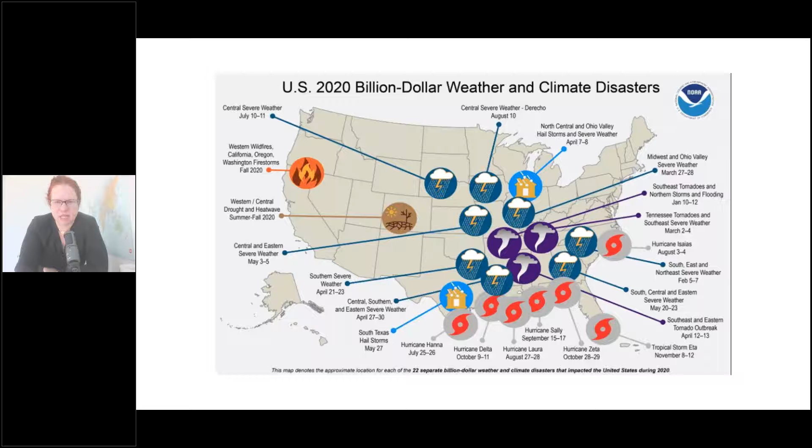We also know, next slide please, that a lot of communities have been facing a legacy that informs how recovery will play out. Policies such as redlining, which was the active disinvestment of funding into communities, specifically communities of color, as well as the planning practices put into place in the early part of the century — putting highways in place of communities, relocating communities out of safe zones into floodplains.

All of these events and histories really inform what our shape of the communities are today. And when you add a mix of extreme storms or extreme weather, we have a recipe for disaster, quite literally.

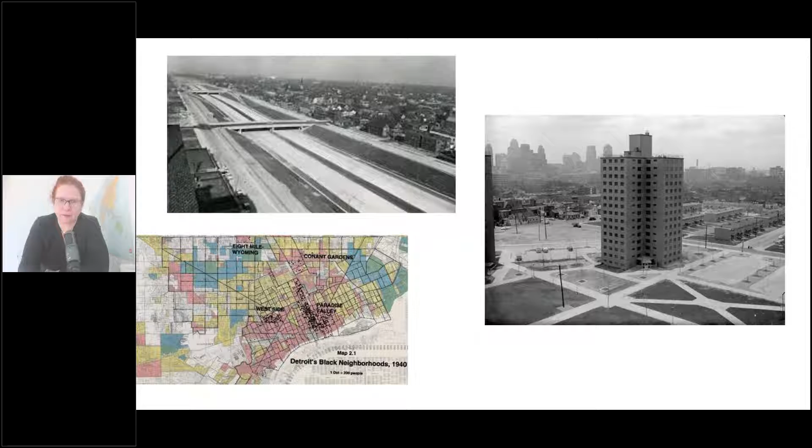It's worth mentioning that the amount of affordable housing shortage cannot be understated. This is a specific concern in Puerto Rico and the VI, where housing is just unaffordable. For most community members that work and make a wage in these communities, there's not enough resources to purchase or support a house. And the marker of unaffordability is if you pay 30% or more for your housing expenses per month. Certainly this is a problem for a lot of communities.

So when we have housing units that are undermined by extreme weather, they are not replaced easily. And we see this particularly in the VI over and over again, where residents cannot afford to live, and the repeated losses occurring with rapidity for communities is creating an incredible burden.

Many of these repeated losses translate into lowered assessed value of the home, and for many communities, assessed value is part of the generational wealth. So when we lose the value of the home, we're losing a legacy that can be passed on to generations. It's also worth noting that because of the rising costs of insurance and the incidence of valuation changing within homes, we're also seeing a lot of assets getting stranded, quite literally.

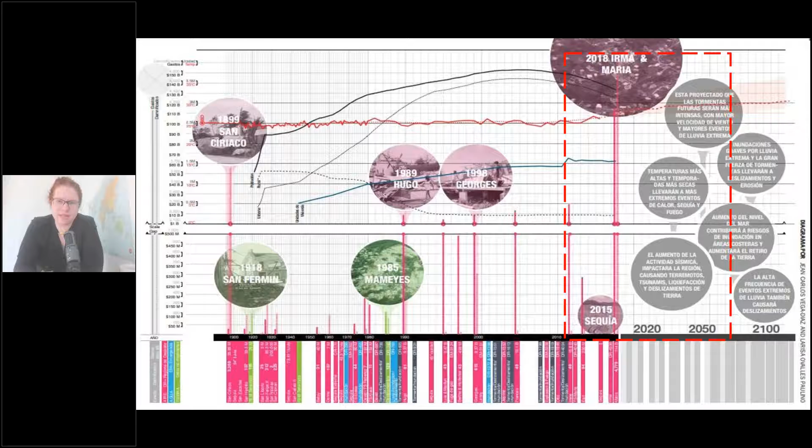So we're working deeply in many communities across Puerto Rico and the VI to try to understand what has happened in previous years to inform where we are today, and then look forward to see what we're actually building our housing to, and what conditions we should be considering as we go forward. We see that these events are occurring with rapidity, so when we work with partners and on the ground, we always bring in partners to make sure that we're collaborative and facilitative entities in a community.

I'm going to introduce you all to a book that we created in Puerto Rico called Keep Safe. Keep Safe was built upon a book that we created years ago after New York City's big event, Superstorm Sandy, occurred, where we built a book called Strategies for Multifamily Housing. This was built with communities in New York City, with affordable housing owners.

This book looks at how do we deal with certain issues around flooding, how do we treat multifamily housing buildings. This is a particular housing stock that has a particular set of needs. So we worked with those owners and operators in those buildings to figure out what specific mitigation strategies would be necessary to support that building through a flood event.

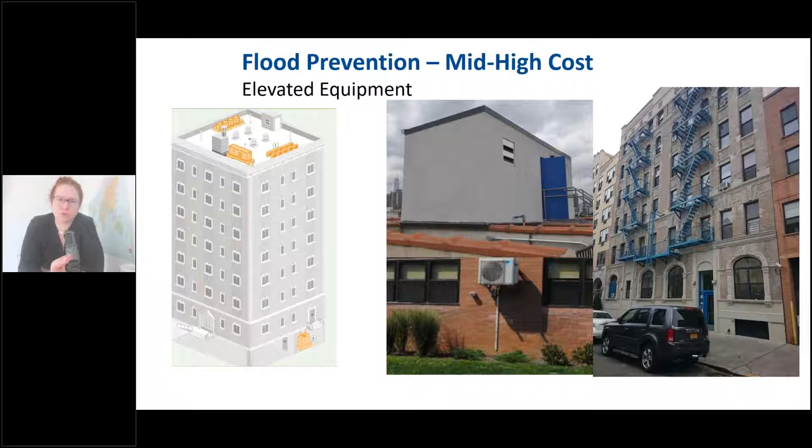And so when Hurricane Maria happened, I went down to Puerto Rico with our team to work with our partners to try to figure out how we could be helpful in supporting recovery. It's worth mentioning that we were no stranger to Puerto Rico. Enterprise had been in Puerto Rico working to build housing and facilitate affordable housing for close to 30 years. So we have strong, long-standing partners on the island, and we immediately got into gear to figure out what we could do to support recovery.

And the damage that occurred in Puerto Rico after Maria was enormous. 90,000 homes were damaged or destroyed by the 155-mile-per-hour winds. This was an event like none other. The world watched how so many communities were stranded by the electrical grid, or left really trying to feel through how to get tools and resources and water. It was a terrible, terrible scenario for the many communities in Puerto Rico.

One of the biggest concerns we faced was the electrical grid just was not up to the conditions that were waged on it. We had distribution lines scattered all across the island, and still a lot of energy is still not back. Almost 80% of the island's crop value was wiped out. So the losses were huge, and what happened was a lot of housing units were just uninhabitable.

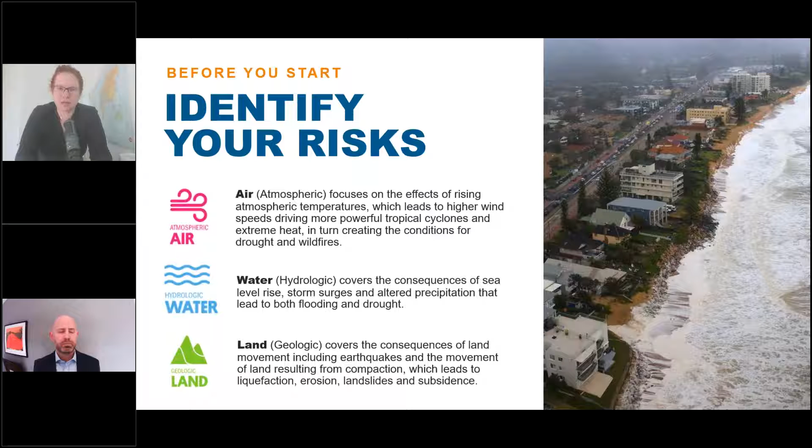Essentially, what we first ask is, what are your risks? Is it water, hydrologic? Is it air? Is it land? In Puerto Rico, we have all risks, so we're dealing with all of the risks that confront us. This is a critical piece because it is a very unique scenario. Many communities don't have all risks, and Puerto Rico has to understand all of these risks now and going forward.

We take those risks and interpose them with housing and the site you're building on. The book is intended for the layperson, someone who may not be a trained architect or designer. It's a visually compelling book that helps anyone touching housing understand where they should be focusing.

The main sections of the book follow the sequence of how you build: Introduction, moving through the safer site—what's on your site, what are the conditions—moving into building protection, the bones of your building, then moving into passive habitability—how do you develop and build the house with an understanding of the natural conditions around you.

Then we move into energy generation and backup. Chapter 5 takes us through water management and water catchment. Then we move into household preparedness, community engagement, and finish with how you put it together and build it.

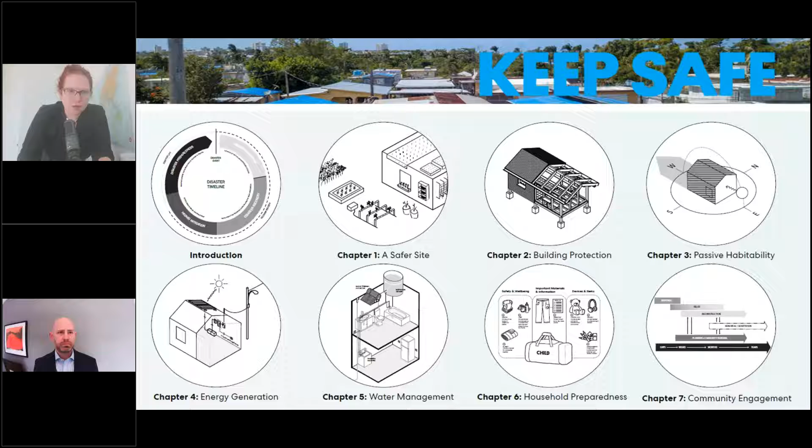This is a big book, there's a lot there. We go through soil orders, we go through where the site is, and we move through what the grid means and how it intersects with your housing.

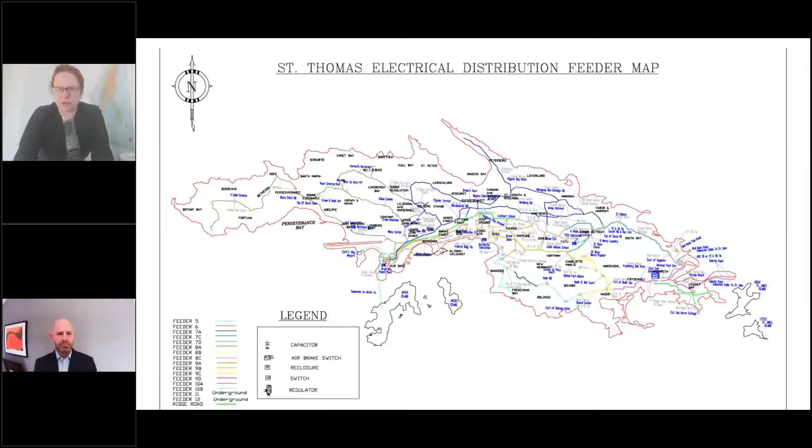We're learning from the past and adapting for the future. That's a lesson I would communicate to all of us today when we think about housing in the Caribbean, because there's a lot we can learn from the lessons of the past. We move into all of these different systems.

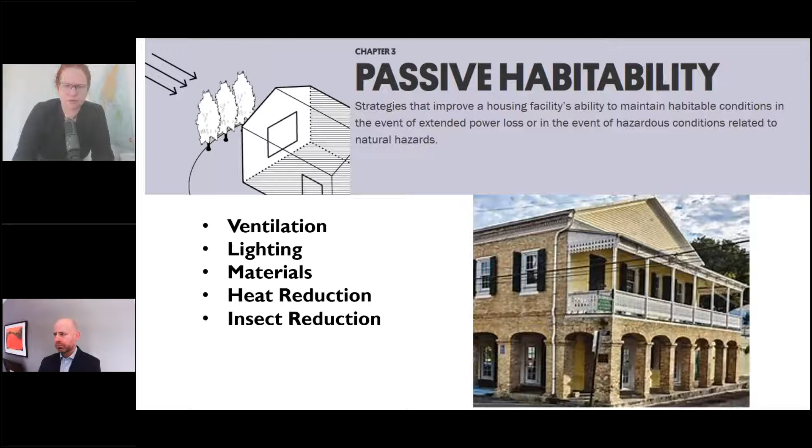Looking at solar orientation, looking at all of these different features of the site.

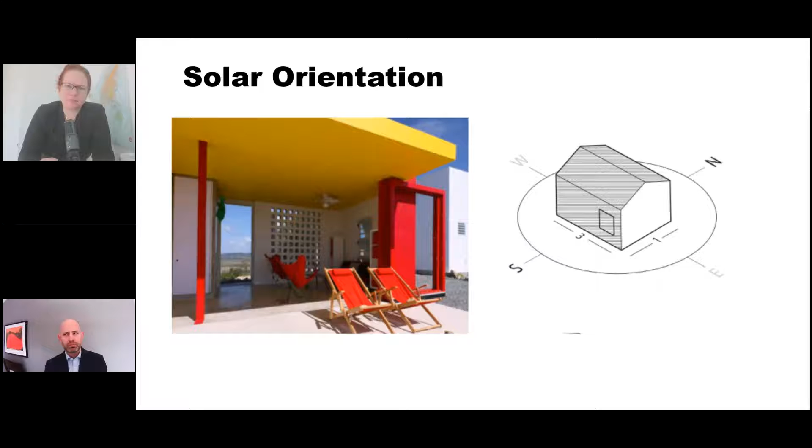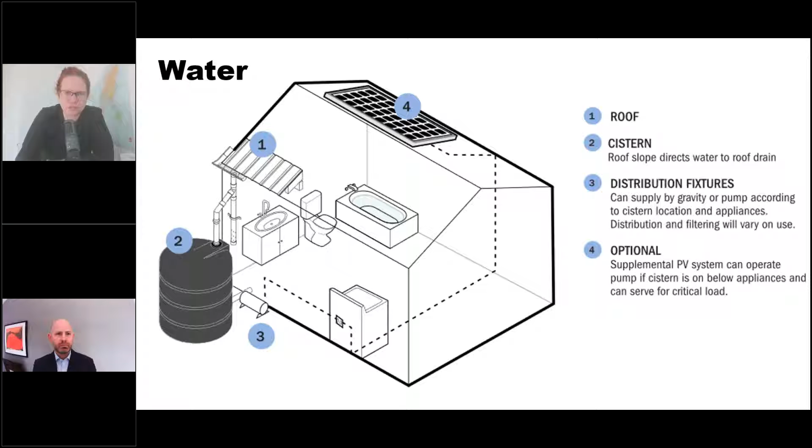We're also looking at community scale work—how do we build community centers that are going to be resilient and able to help support communities? Bringing communities together, how do you build a community infrastructure and community resiliency center?

To conclude, this book is available. We train a lot in Puerto Rico and the Virgin Islands on it. We've also taken it to Florida, so we've got a Keep Safe Miami effort, and we're using this book to inform a lot of our work around the country. I'm really excited to be part of this conversation today. Contact me if you'd like a copy of the book or more information about this really important piece of guidance.

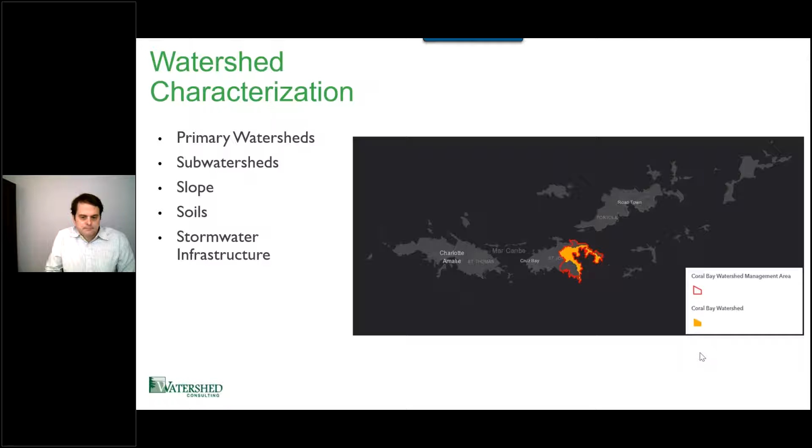So the main watersheds in Coral Bay, where the Coral Bay Community Council manages, are Great Lameshur, Coral Bay, and Mennebeck Bay. The watershed we focused on in this watershed plan update was Coral Bay, which is the main watershed shown in orange in the middle.

I'm not sure I actually mentioned that the work I'm doing is giving kind of a technical snapshot of some of the analysis that went into the watershed management plan. The Coral Bay watershed management plan was updated, complete at the end of last year. This was a 5-year update, so now there's a new version available that's going to carry forward the next 5 years. That's where this information has come from.

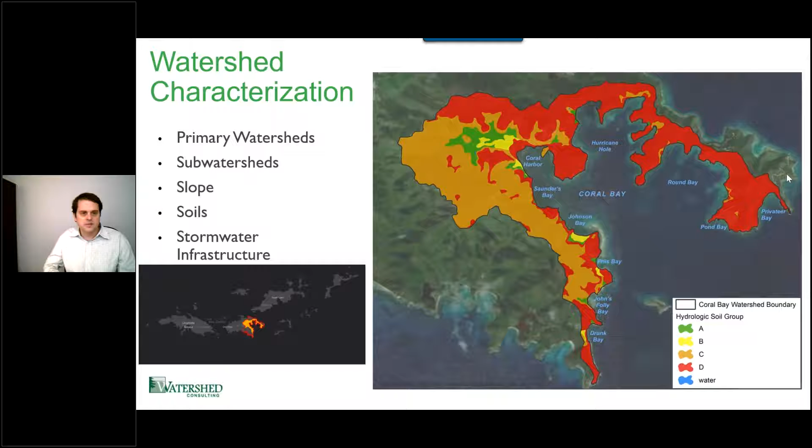When we started this work, there were a number of infrastructure asset points mapped, and we did some refinement of those points as we went along. Just to give you an idea, those points are things like culverts, swales, water bars—that type of infrastructure. Coral Bay is predominantly a residential area, and development is diffuse. There's a more urbanized center, but also a lot of diffuse development up the hills, involving roads, driveways, and residential units that surround the main town area.

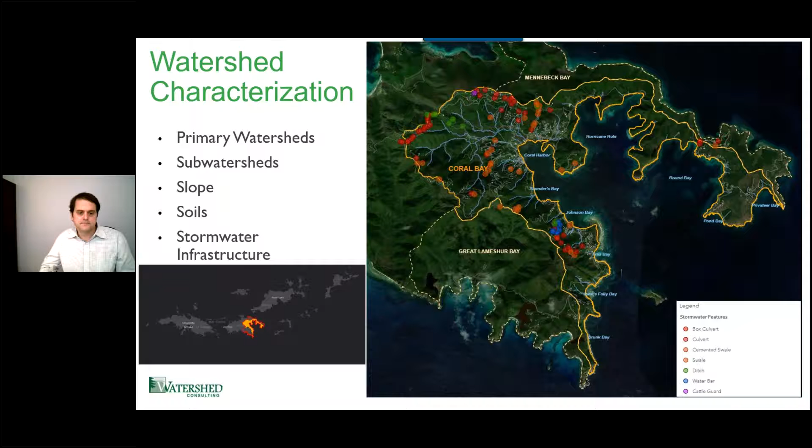As part of our plan, we used a water quality modeling tool called the Watershed Treatment Model, a spreadsheet tool developed by the Center for Watershed Protection. The goal was to investigate the location and severity of land-based sources of pollution, since there are quite a few issues with that. We needed a tool to assess nitrogen, phosphorus, suspended sediments, and fecal coliform based on potential sources like land use, soil type, sewage use and disposal, gut erosion, and marina characteristics.

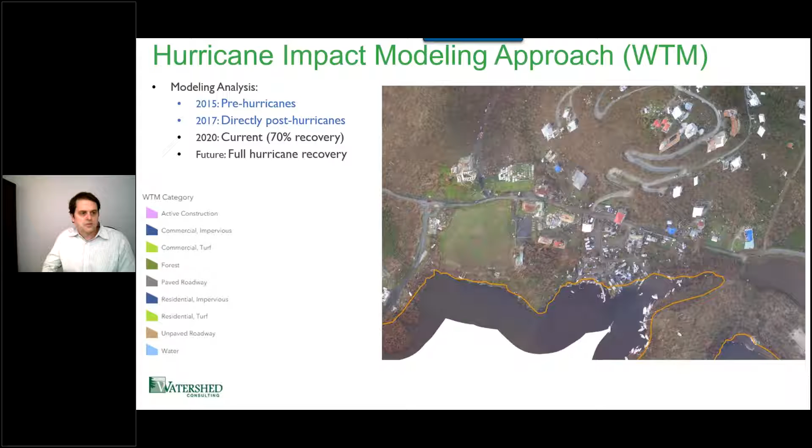We were really focused on the impact of Hurricanes Irma and Maria in 2017, which was the defining moment of the past 5 years. We modeled 4 conditions. The first was 2015, before the hurricanes. The next was 2017, directly after the hurricanes—this image shown here was clearly right after the hurricane, so we looked at the land use conditions at that time.

Then we looked at the current conditions, which assumed 70% of the homes or businesses that were destroyed were recovered, based on data from the Coral Bay Community Council. When damage occurs to these places, it means there's disturbed land, more prone to erosion and sedimentation. As things recovered, homes were restored, rebuilt, and the land around them stabilized. So in the current, 2020 condition, we assumed 70% of destroyed areas were recovered. The final condition was the full hurricane recovery condition, which is the future condition.

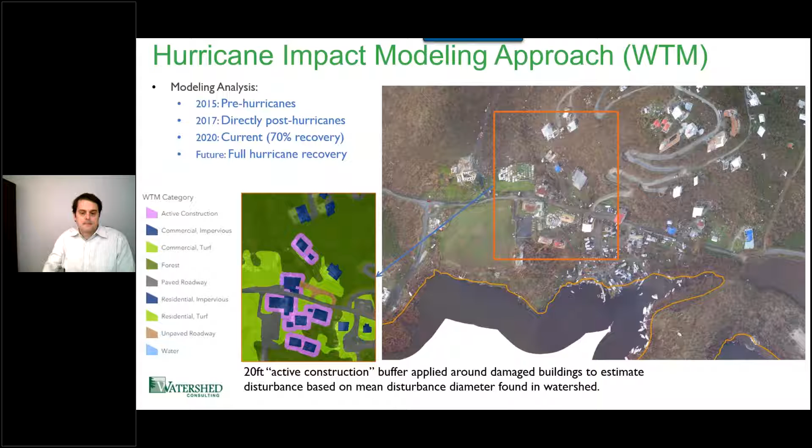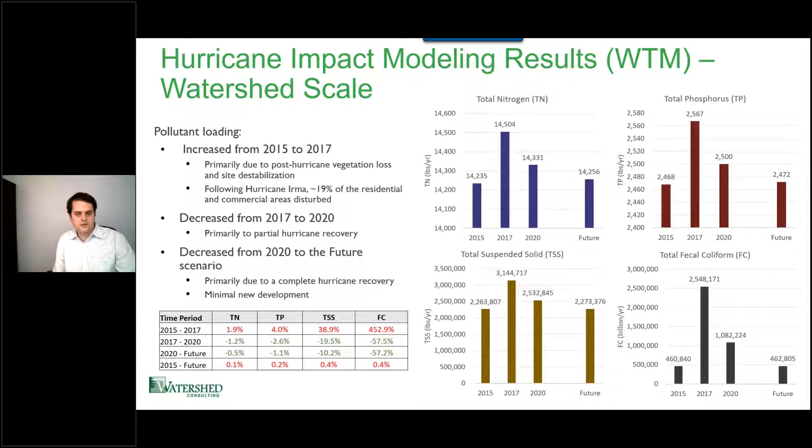That trend of peaking right after the hurricanes was constant across all the different pollutants that we modeled.

The other thing we did was look at road paving as a best management practice in Coral Bay, which might seem odd since paving roads isn't typically considered a stormwater BMP. However, conditions in Coral Bay really necessitate stabilizing a lot of roads. You can see in this upper photo the roads are incredibly steep and act as a conduit for water. Since unpaved roads are often unstable and lack proper hardened surface material, you get a lot of erosion right down the road, and the water follows it, carrying sedimentation down to the harbor.

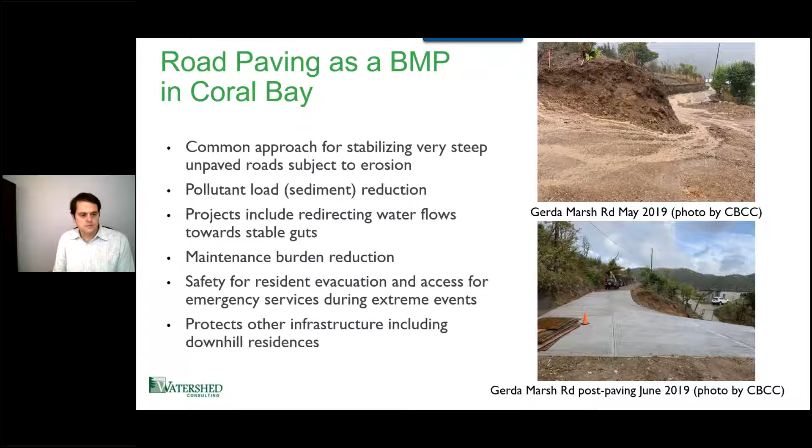So we looked at the unpaved road network and its effect in terms of sedimentation to the harbor.

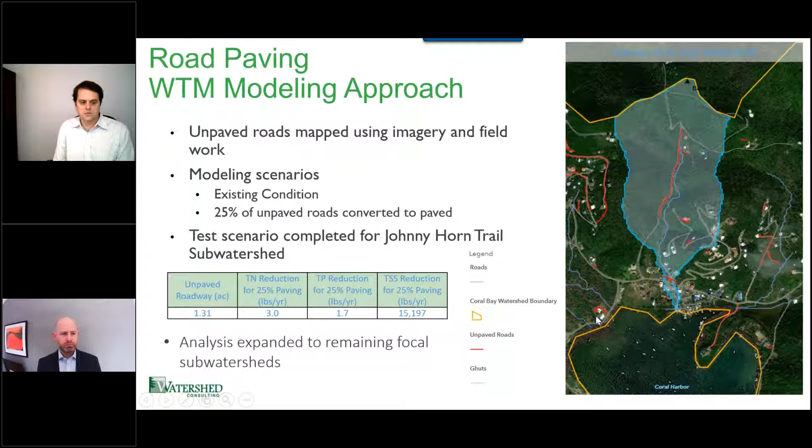We took one of the sub-watersheds, the Johnny Horn Trail sub-watershed, and did a test analysis investigating what would happen if 25% of the unpaved roads were converted to paved. It showed a fairly significant impact on pollutant loading—not just TSS, but nitrogen and phosphorus as well. So we expanded that analysis to the rest of the watershed.

When we expanded it to the rest of the watershed, we learned that paving, to an extent, is really important as a BMP and has a real place in the watershed as a way to manage sediment and erosion to the harbor.

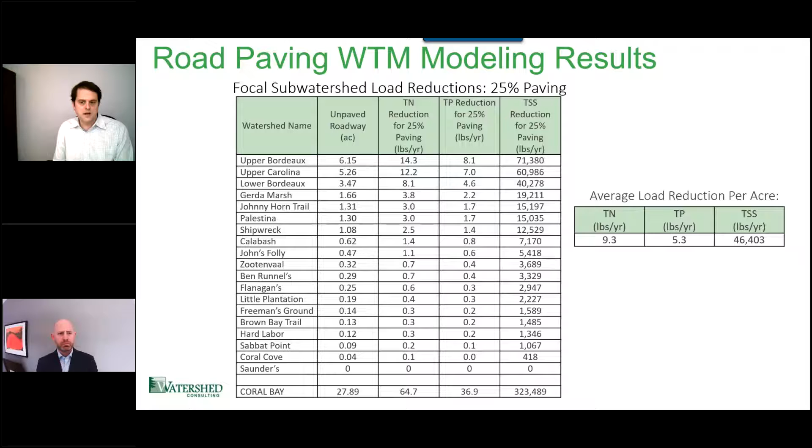But we didn't know where in the watershed we should recommend paving to occur. So we did a second analysis looking at the slopes in relation to where all the unpaved roads were located.

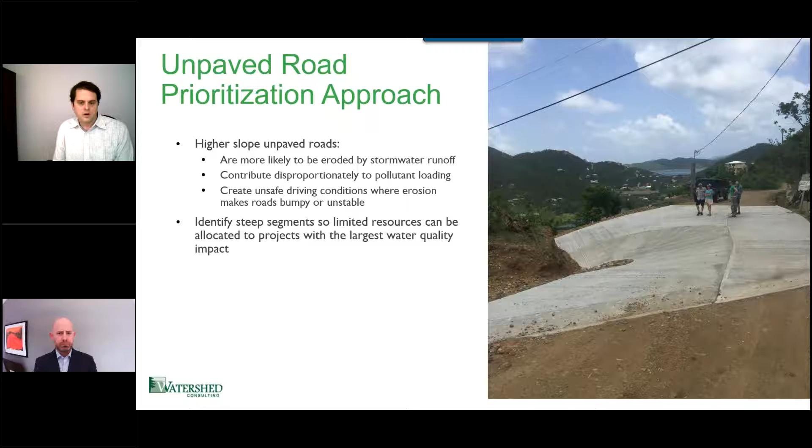We found there are 28 acres of unpaved roads in the watershed. We divided them into 100-foot segments, calculated the average slope, and categorized those by low, moderate, or high slope. The other piece of modeling we did was modeling flow as well—specifically peak flow, because we wanted to understand how peak flow also influenced water quality impact.

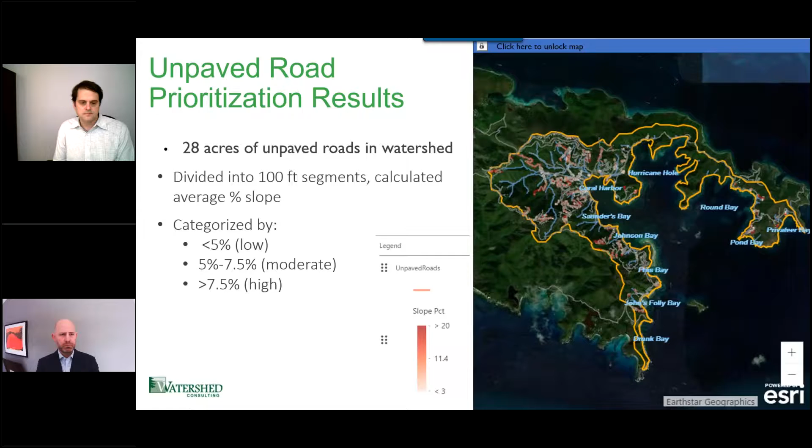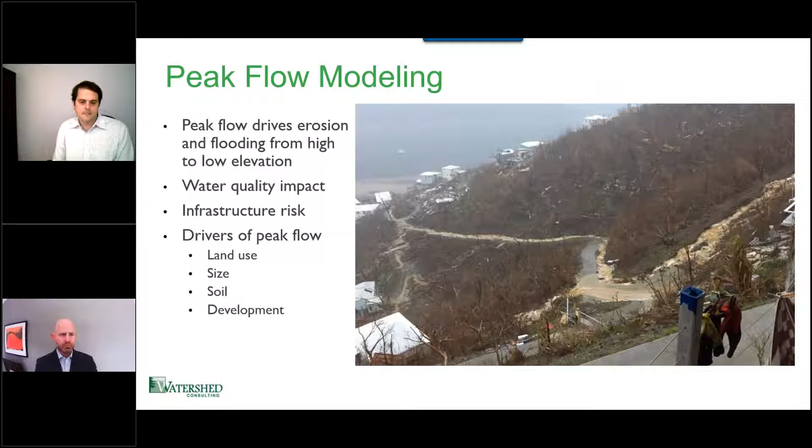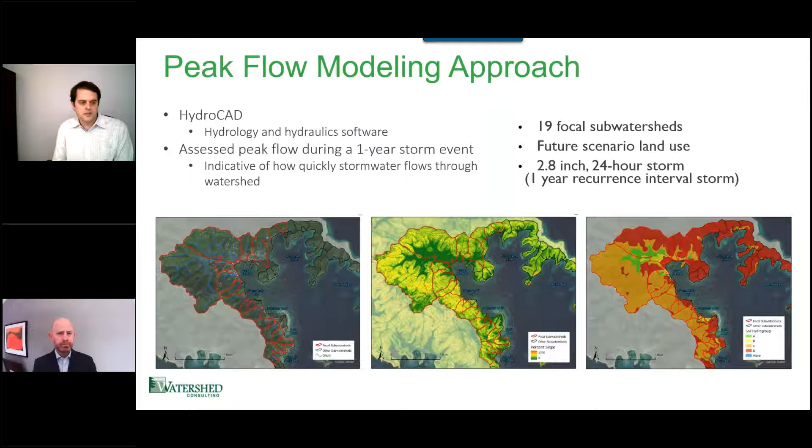We used a tool called HydroCAD for that. We modeled the 1-year storm event, about 2.8 inches in 24 hours, for the 19 sub-watersheds presented at the beginning of the presentation.

Just quickly in a nutshell, I think the modeling really showed that impervious cover alone will not be enough to reduce the peak flows. Really, it was focusing our recommendation on managing flow patterns at the neighborhood scale, focusing on disconnecting impervious surfaces and restoring the natural flow patterns in the watershed.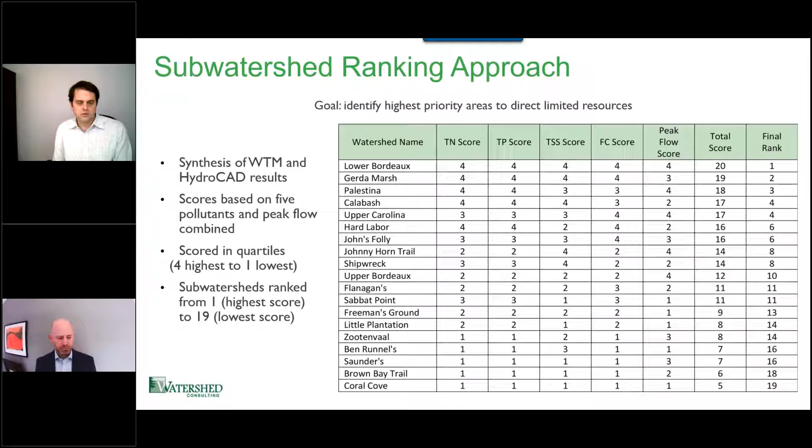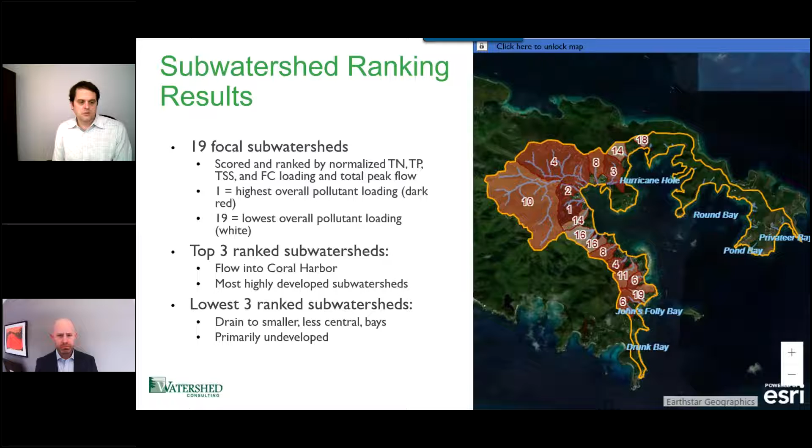And so here it is in graphic format. You can see on the right, 1, 2, and 3 are right in the inner Coral Harbor. Those are our highest ranked subwatersheds. And the lowest 3 were ones draining to smaller, less central bays and really primarily undeveloped. I think this is my final slide here.

Back up just 1. So the 3 highest there are in red, the arrow, that's Coral Harbor. The really great thing was that those results did check out with the visual results that people living in the watershed, and also Coral Bay Community Council, were observing in terms of where the sediment originates from during storms. It's really that inner harbor which is producing most of the sediment load. So it's a good check in terms of our methods.

And I think the important thing is that this lays out a nice quantifiable approach moving forward to take targeted action to reduce sediment and other pollutants to Coral Harbor. And I think it can be broadly applied to other similar watershed plans in the future. So I appreciate your time, and thank you.

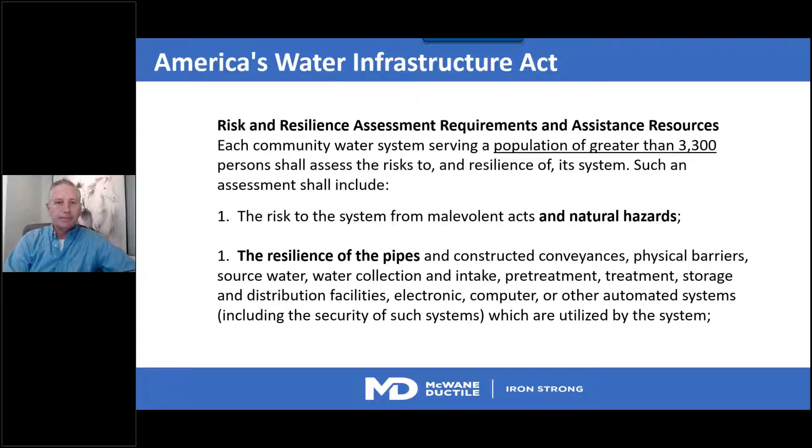Here's a little bit more of a detailed slide for the seismic activity. Those in very active, seismically active areas are well aware of this, but also in surrounding areas, even though you might not be in a red bullseye, those close to it can also be very much impacted. You can see in the slide on the left down at the bottom, Puerto Rico is an extremely seismically active area, so they have the impact of hurricanes as well as seismic activity.

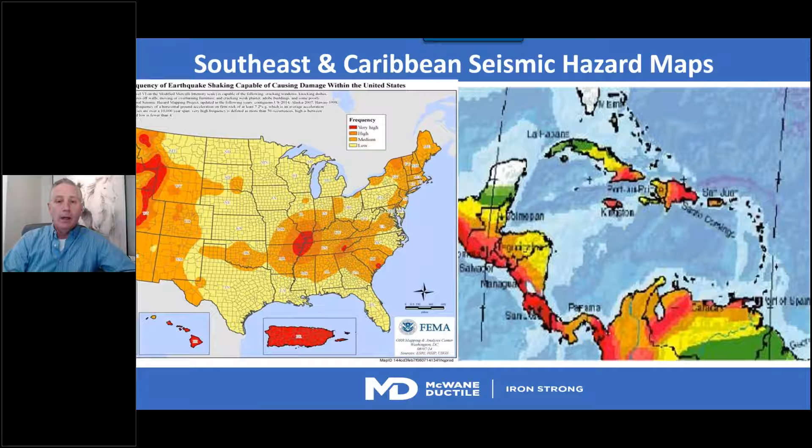This is a schematic that helps us identify what are the zones in your communities that can be most impacted by seismic activities and also storm surge. One of the things that's very important to note on this slide is look at the right-hand side, the bottom right, water saturated sand and mud, and poorly consolidated soils. That water saturated sand and mud has the highest impact from seismic activity, the most risk.

So that's very easy for us to zone in on those areas as having the highest criticality and highest risk. But also at the base of a mountain, where we have steep bedrock that comes down to a valley area, there's another zone that's number 2 for risk, in the poorly consolidated soils, or alluvial soils. They're often areas where homes are built with moderate elevation and beautiful views. Unfortunately, those areas are some of the most seismically risky because of the poorly consolidated soils.

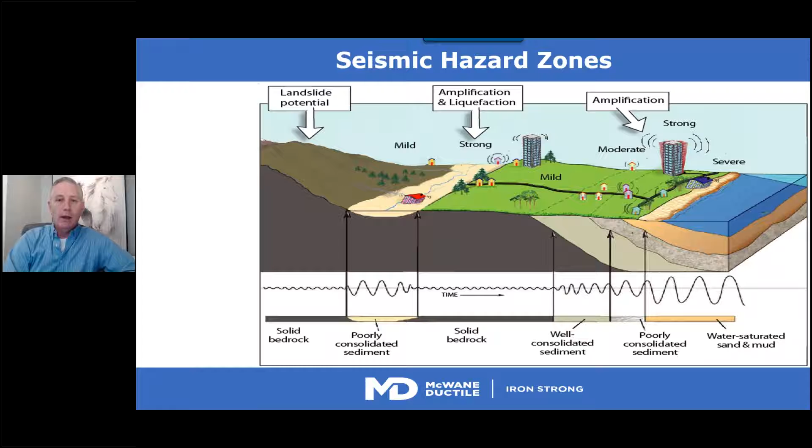So anyway, when we're looking at buried pipelines, this is a lifeline for most communities. The water and the ability to have it not be contaminated are critical to the lifeline of the community. Even though they're buried below ground, it's almost like our arteries, bringing water and life-sustaining product to our homes and businesses.

But one of the most critical things to keep in mind, besides just having clean water available, is fire protection. In the 1906 earthquake that hit San Francisco, the earthquake was devastating, but what really did the most damage to the city was the resultant fires afterwards. Natural gas lines broke, and it caused more devastation to the city than the earthquake itself.

So when we're looking for seismic resilience, we're looking to maintain that hydraulic capacity, the ability of those pipelines to not separate or become crushed by the external loads and pressures from seismic activities. We're looking to maintain hydraulic flow, and to minimize any kind of shearing damage or compression on the pipelines. And of course, we want to prevent cross-contamination.

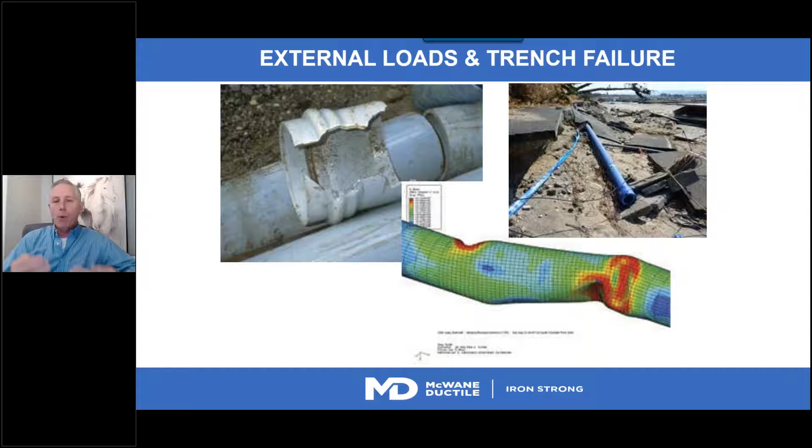On welded steel lines, the external loads will actually buckle and can potentially shear off the pipeline as well, because they're kind of rigid. They don't have the flexibility or joint deflection in order to handle the differential ground movement from seismic activities.

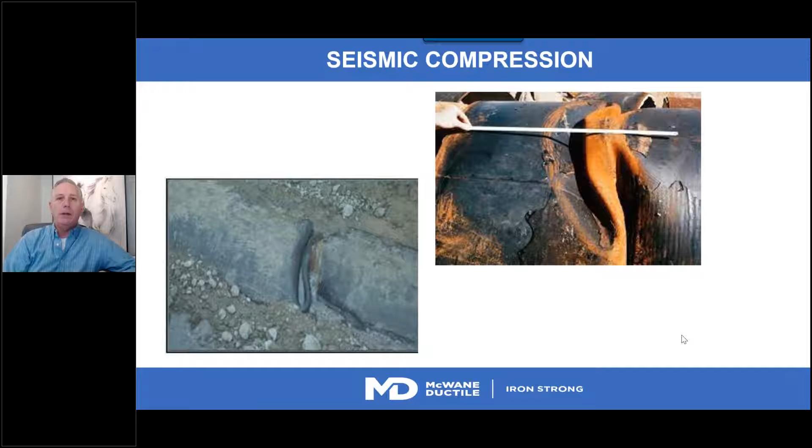Here's an example from a welded steel line where it's actually buckled. What's happened in this line is the pipeline didn't technically fail, but that buckling reduced the hydraulic capacity of that line, and the internal pressure going through that section dramatically went up. So when that happens, it's a ticking time bomb, you probably don't have a lot of time before that pipeline is going to fail. It's an area that needs to be repaired, and repaired quickly.

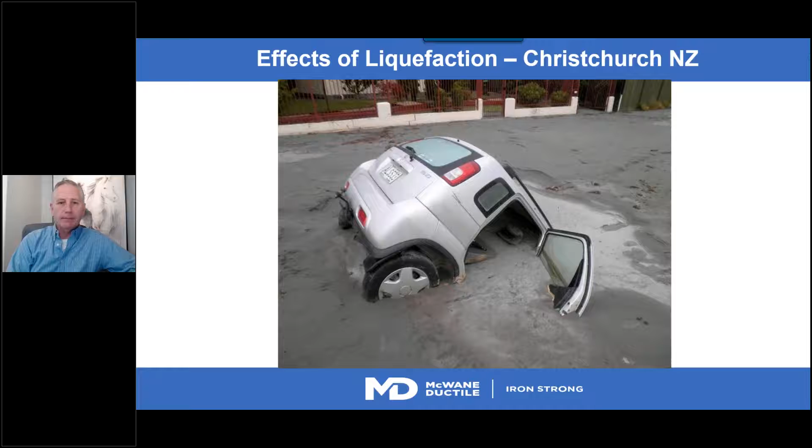So when we're looking for seismic resilience and looking at different pipe materials, all pipe materials are not made equally. The higher the tensile strength of the material, the more likely it's able to prevent buckling, crushing, or shearing. Some pipe materials, as you go down into the plastic pipe materials, become very susceptible to seismic activity and differential ground movement, either loss of the trench so the pipe doesn't have support, or a situation where the bell and spigot separate. So if forces are applied via tension or compression, they will also fail. Joint deflection is a very key component in order to provide higher resilience.

And the systems that are out there, according to the ISO 16134 international standard for seismic resilience, are ERDIP systems.

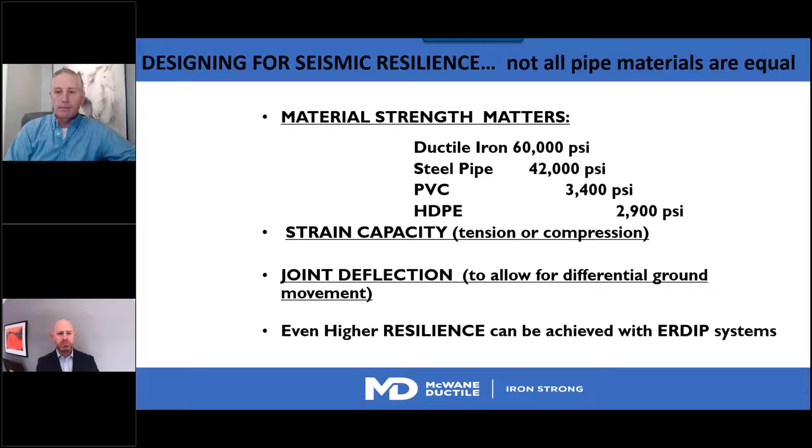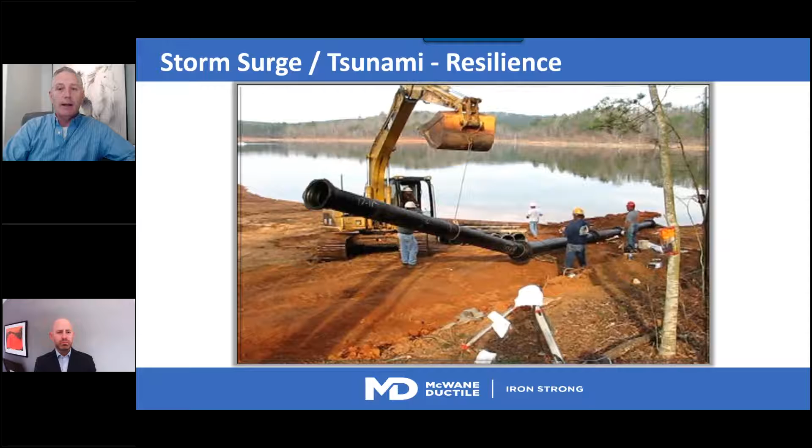Here's an example of some ductile pipe. We call it river crossing pipe. You don't even have to have it in a trench. You can lay it across a bay, an estuary, and basically it has joint deflection up to 15 degrees. It is a very valuable option for communities that can't dig a trench or want to go across a lake, stream, river, or estuary. The weight of the material settles it down into the sediment and provides all the support that pipe material needs.

So anyway, the key components of an ERDIP system are high axial strain, joint restraint, and joint deflection.

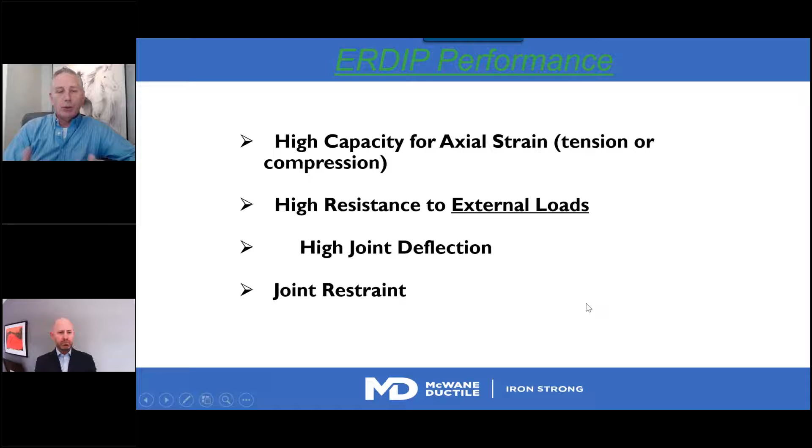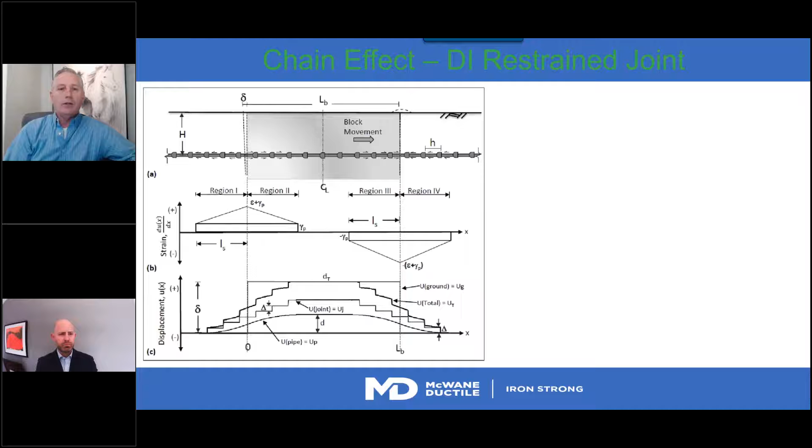So in order to increase seismic resilience, the pipe materials that can provide almost a chain effect are going to be more resilient. The chain effect allows the pipeline to deflect, to bend, but not fail.

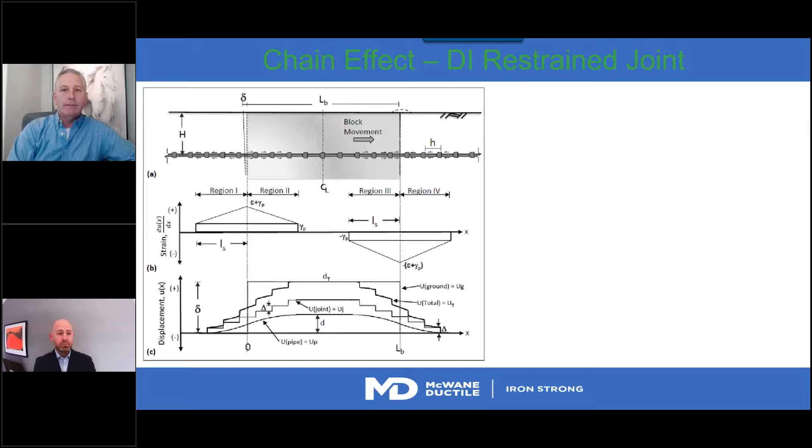So here's what the pipeline looked like in the soil. And here's what it would have looked like if we would have had that ERDIP system. It would have deflected, and it would have stayed together, and that system would not have failed.

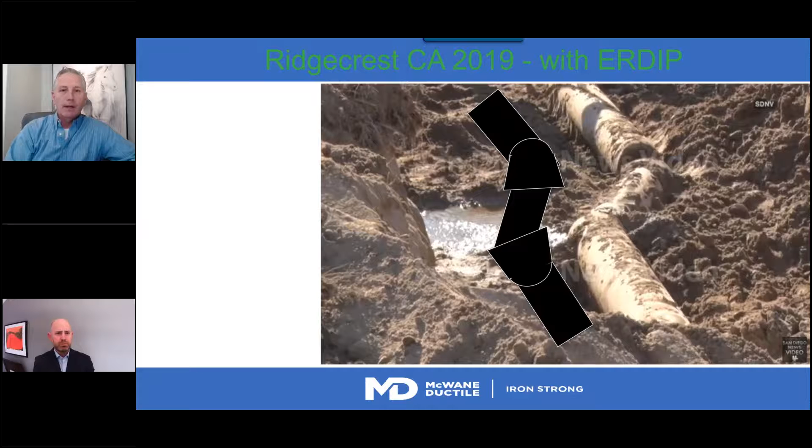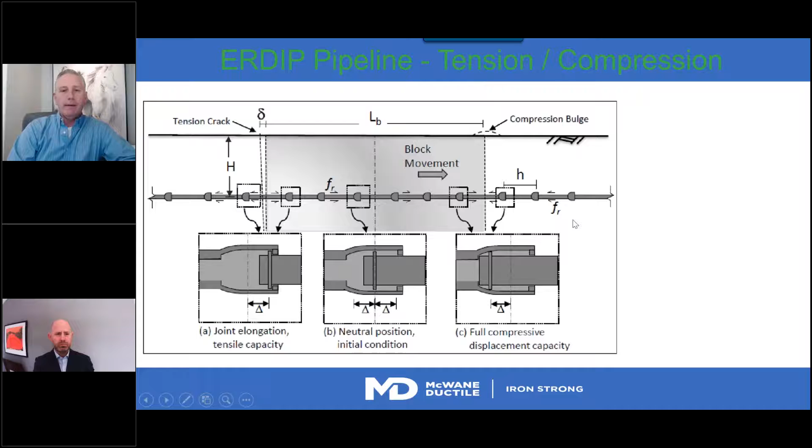Also with block displacement and movement, pipelines need to be able to have axial range where they can expand in tension or be able to move together in compression. ERDIP systems do that.

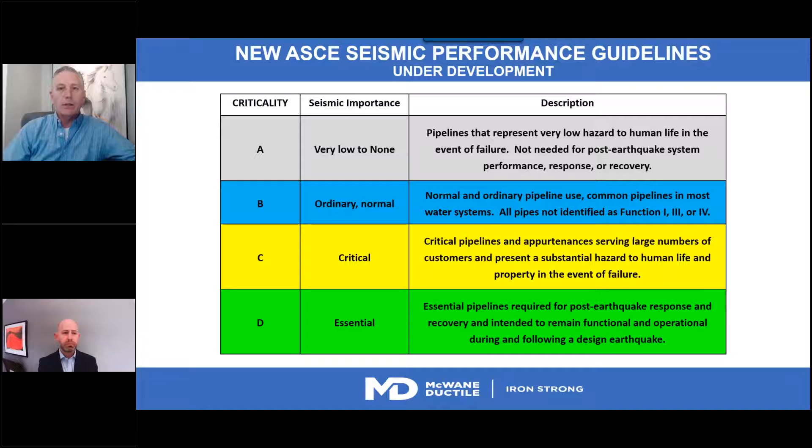So here are some guidelines that are under development with the ASCE Seismic Task Committee. These are not finalized yet, but what this does is it helps the community use some evaluation. We look at the criticalities of that infrastructure, of that pipeline you're looking at. These will probably be finalized at the Pipelines Conference coming up in June of this year, but this is the type of thing that is under discussion right now. So what we want to do is be able to adjust and look at the criticality levels and recommend commensurate levels of protection depending upon how critical that pipeline is to your community.

So this is where the rubber meets the road. You notice the color codes there, the commensurate gray, blue, yellow to green. The higher you go up in seismic resilience, here are the guidelines being discussed in order to provide adequate seismic resilience for your pipelines.

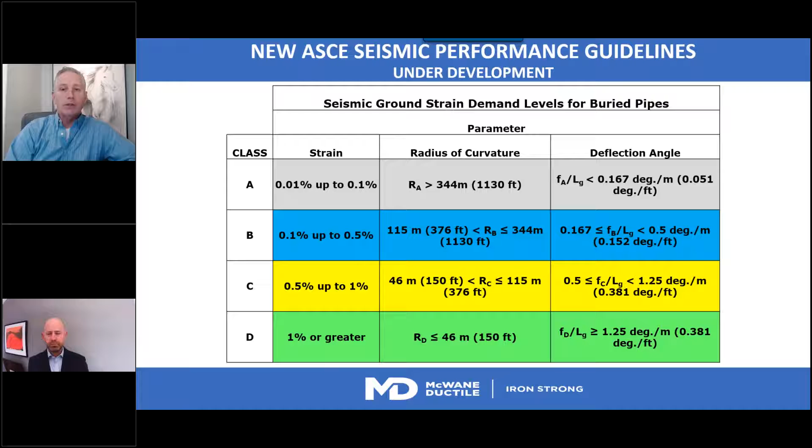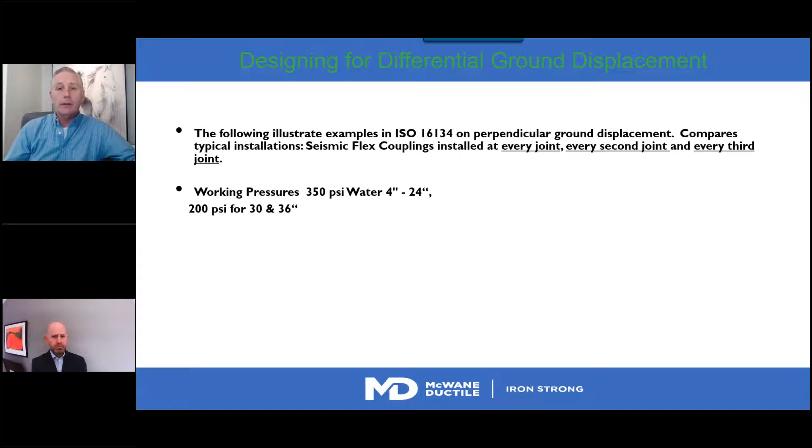So when we're looking at an example from the ISO 16134 international standard for seismic resilience, there's one material in it that provides the level of protection. Internationally, it's ductile iron.

So here's what we're looking at. We're looking at a pipeline's ability to deflect and also not come apart. That's the restraint joint for an ERDIP system. It deflects, but it does not come apart.

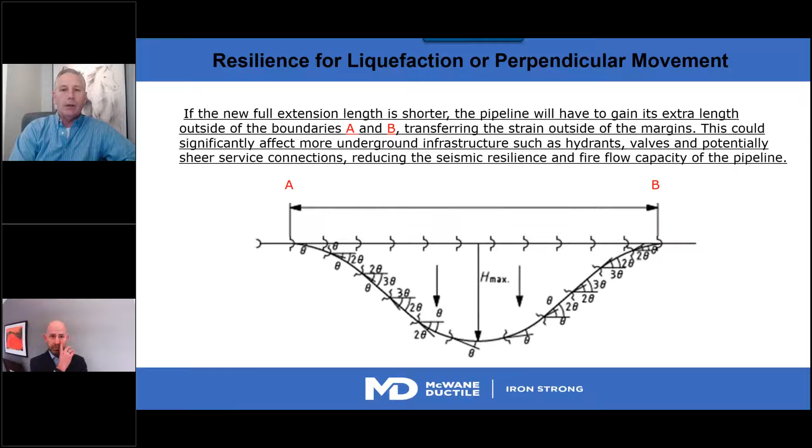And what we want to do is address the seismic activity in that specific area and not transfer that tension or compression outside of those boundaries, because you could shear off pressure relief valves, hydrants. You can actually transfer that strain up and down, cut off connections to homes. So that's what we want to do. We want to handle that strain and compression locally, wherever that event is, and not transfer it up and down your pipeline systems.

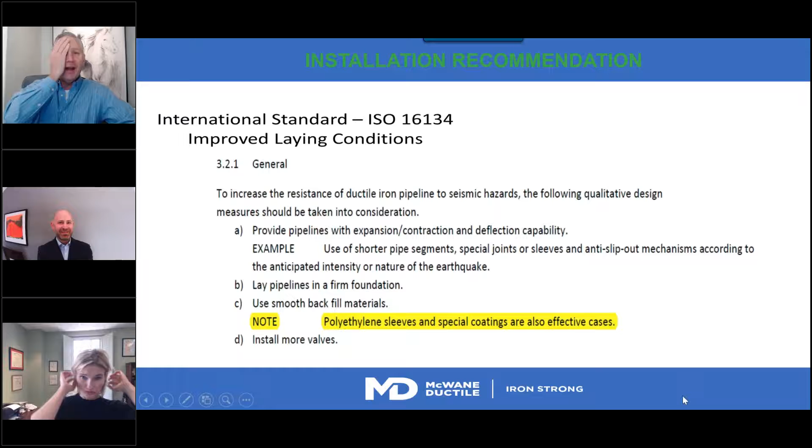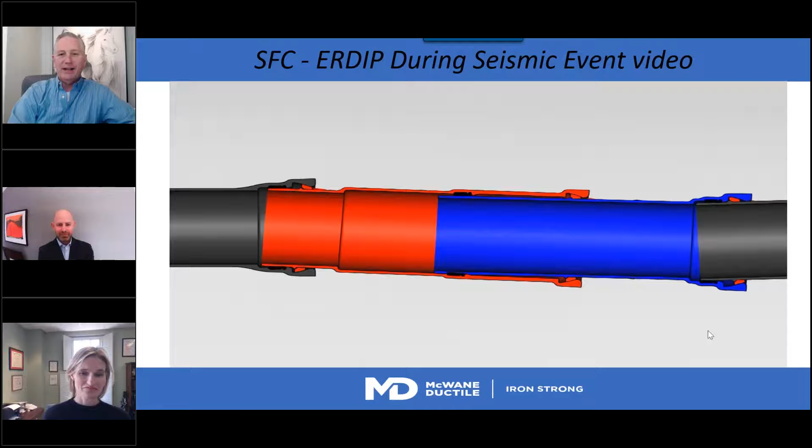If you can fast forward to where it goes into the illustration of the city a little bit further. It was almost over. There we go, perfect.

This illustrates how that fire hydrant on the left is actually protected and not sheared off, so we don't have a failure and we can still provide fire protection. Notice how the pipeline deflects and actually expands, and that strain isn't transferred over to the fire hydrant or the connection to a home.

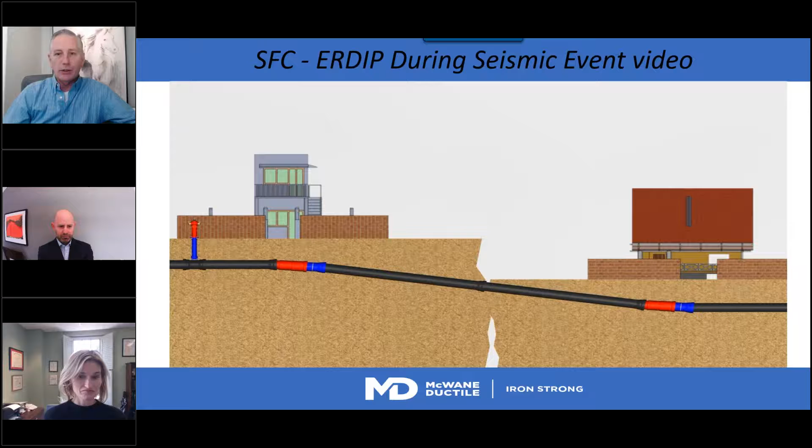Hey y'all, that was really cool, and I can actually be quick if that would be useful to the group. I'm going to be talking about the law side, roads and resilience. We've had some really great presentations about physical things happening, and we overlay all these physical things with words we make up - we manage them with law and policy, and it really affects what happens in the built environment. I'll go fast, I promise.

We are moving into a time where we live not just with big hurricanes and events like that, but persistent stress. These stresses seem less immediate, but they are really what I think our local governments are dealing with on an ongoing basis, cumulatively.

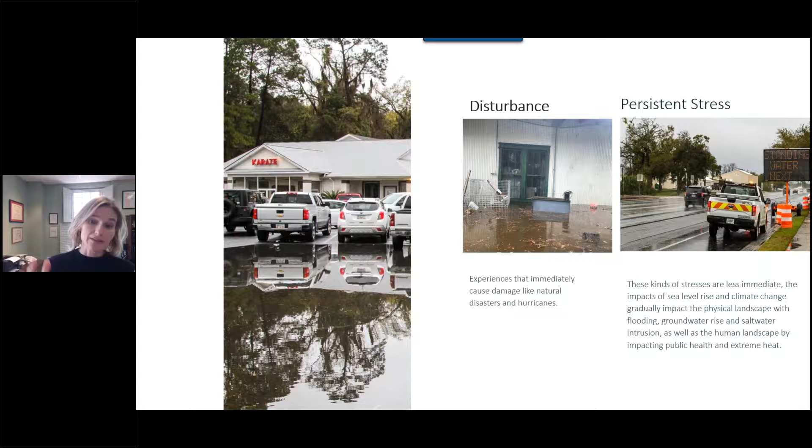I'm talking about roads because it seems like stormwater drainage is where a lot of the problems begin, but roads are where people complain, and roads are what people see. They're kind of the canary in the coal mine of sea level rise, so we've been thinking a lot about the legal environment governing how we manage roads.

There are some big picture things to take away - these issues are challenging local governments. Governments have a duty to maintain roads, so they can't just build something and leave it alone; they have to take care of it and keep both the public welfare in mind - the entire community - as well as individual property owners. If they don't do a good job maintaining these roads, they can be liable for violating their duty. They could abandon these roads, but that could make them liable to individual property owners for a takings claim - I'll talk about this again.

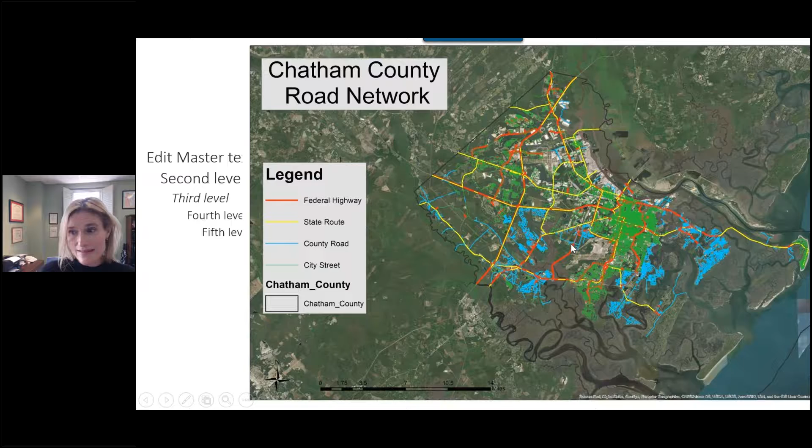They may say it's a nuisance—this is creating a nuisance to my property, that's a nuisance claim. Or it could be negligence: the action the government took, or didn't do, to repair the road is causing harm, like flooding or damage into my property—that's a negligence action.

You could also bring a claim saying whatever you've done, I don't like it, or you haven't done enough—it's changed my access, it's changed my property values. That could be a constitutional claim or takings claim.

We have a long law review article about all of this, but the point is that every jurisdiction in our study area and the Southeast has a different level or kind of duty, whether state, county, or municipality. This illustrates how challenging it can be for an individual to figure out what might happen, or to plan around the duties to maintain roads.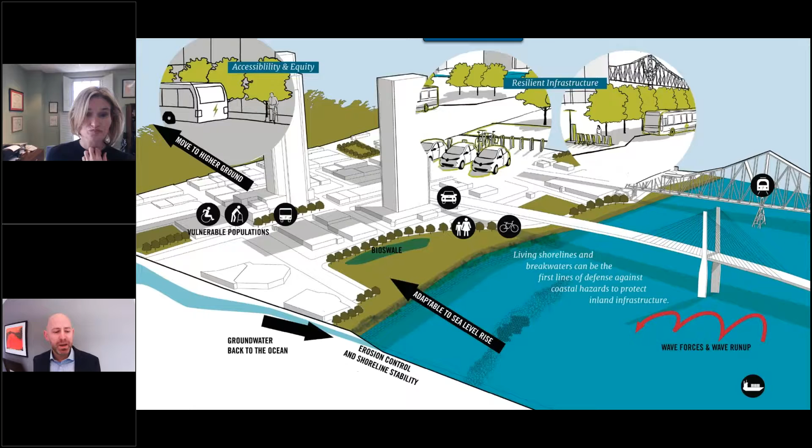Thank you so much, Shane. As a lawyer, I appreciated all of that very much. Perhaps I had a little bit better background in it than I did in the very pipeline piece from John.

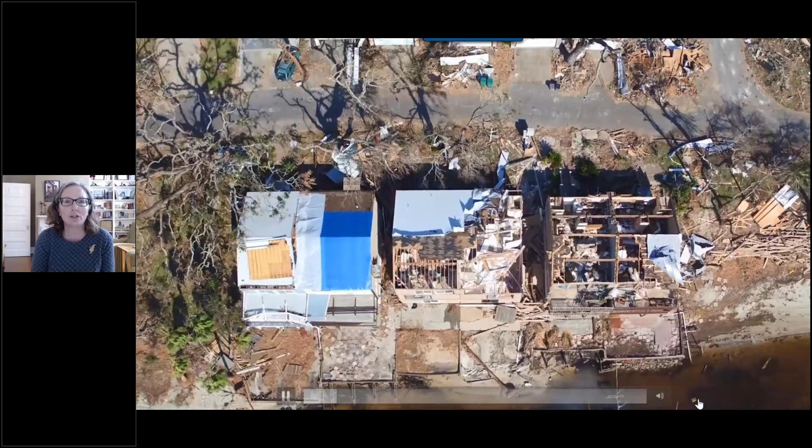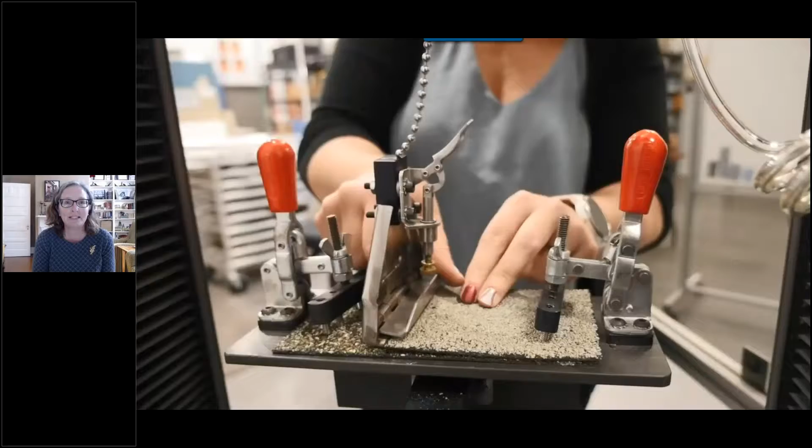So we work extremely closely with IBHS. This is a little bit of a why: all of their research is focused on the losses that are seen in the United States by the insurers that write and reduce our risk and keep us wrapped in insurance. All of their research is done in an amazing facility, and our job is to get that science, done by meteorologists and PhDs and architects and engineers, out into the world and integrated into local communities.

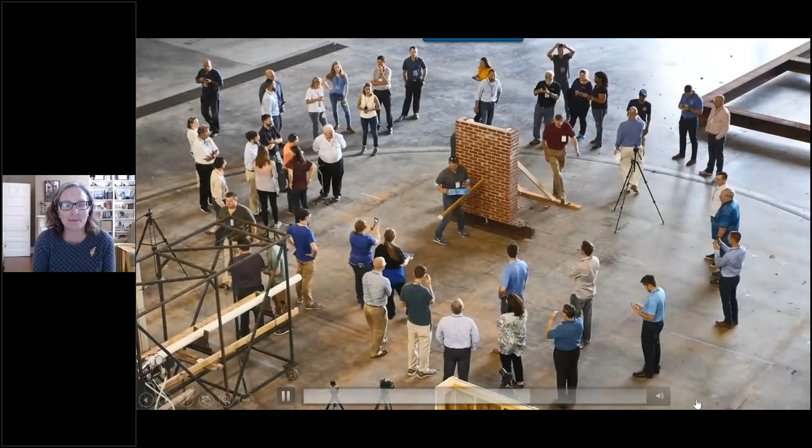So Michael told you in the beginning he works for IBHS. He doesn't get to do the cool stuff, because he's a lawyer, but he does get to visit the lab, so he gets to see it sometimes. So we take the knowledge and the expertise out of the lab and put it into the real world to begin that resiliency process on a community level.

2017 was the beginning of what feels like the end of the world for most of us that work in resiliency. That was Harvey, Irma, and Maria, and it just has not stopped. What we know is that building codes, where enforced, are key, where enforced. So you get what you inspect. Flat out, building codes work, but they have to be enforced, and there has to be an inspection process.

But the weak link in most building codes up to this point is the roof. And what we know is that once you lose that roof cover, the water pours in, and just as much damage happens when you've got that water pouring in.

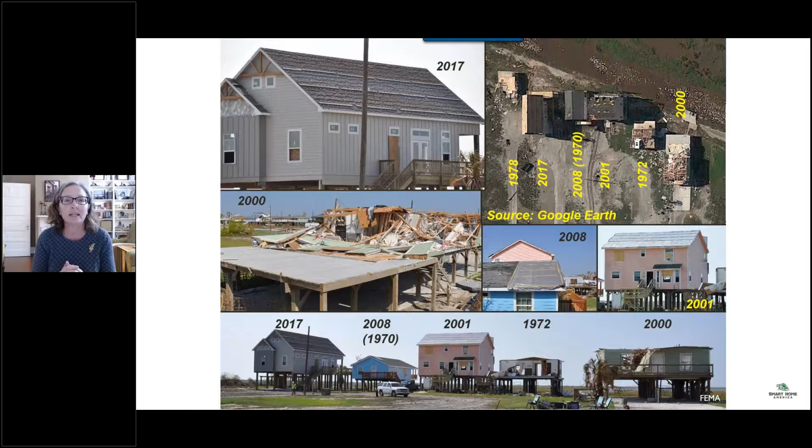Two-thirds of Americans in our country are underinsured, if not uninsured, on average around 17%. So if you're looking at a home valued at about $200,000, that homeowner is missing $34,000 to recover. That's the average American home missing $34,000 to recover, meaning when they get that check from the insurer, there's a big chunk missing.

Everybody knows the stats on businesses. One in four never reopen after a disaster. Those are your small businesses, the mom and pops - that's who runs the country, right? We all lived that in the pandemic when everybody had to shutter. You don't get to go to the grocery store, the corner mart, you don't get to drive and get your fresh loaf of bread. So they are underinsured. Small businesses are underinsured, but a lot of them aren't insured at all because it's an expense they can't take on. So they have to be built correctly in the beginning, or retrofitted, so they can withstand significant weather events and still open, still serve the populace, and get the economy going again.

Keep going, Wendy. This is a little video.

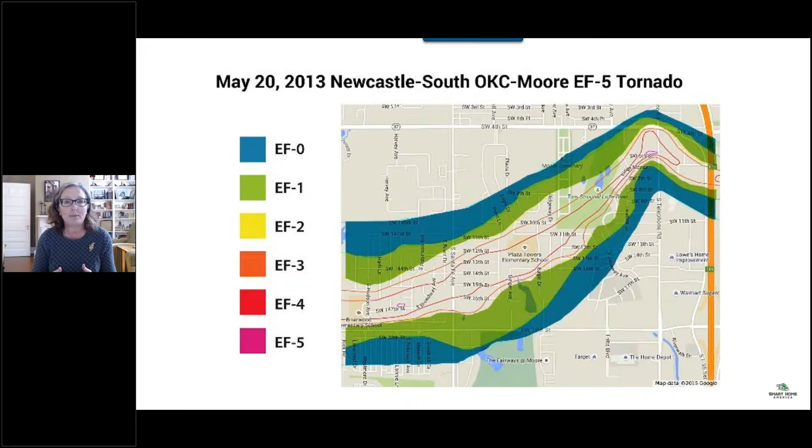But what I'm saying is that we know how to build now so that we can eliminate the debris fields of an EF0, 1, and low-level 2 if we're building to the fortified home or fortified commercial standards. Because of the way it's constructed, and because of the science behind it, we now know how to build that way and reduce the damages that we see. So that's lessening the time between disaster and recovery.

And you are stuck in a loop, Lindy.

There you go. So in the United States, where we see tornadoes and hurricanes, the majority are either EF0, 1, and 2 - that's the majority that touch down - or tropical storms and Cat 1s and 2s. So that's like 70%, and Heidi can correct me on that. So lots of low level events. What I'm saying is that building to a little bit above code - just a smidge above code - can really affect the way a community looks after those events have happened.

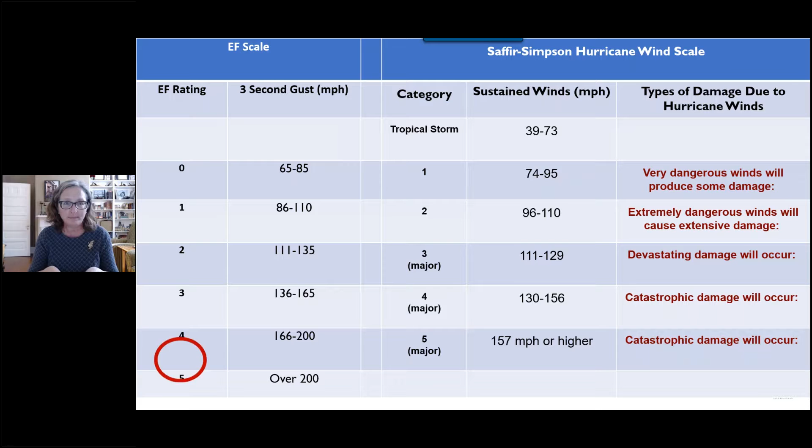So they called it Habitat Strong - they had to put their brand on it - but that's the fortified home program. So there's three things I need you to think about when you're looking at that house: Habitat, affordable, and can be done anywhere.

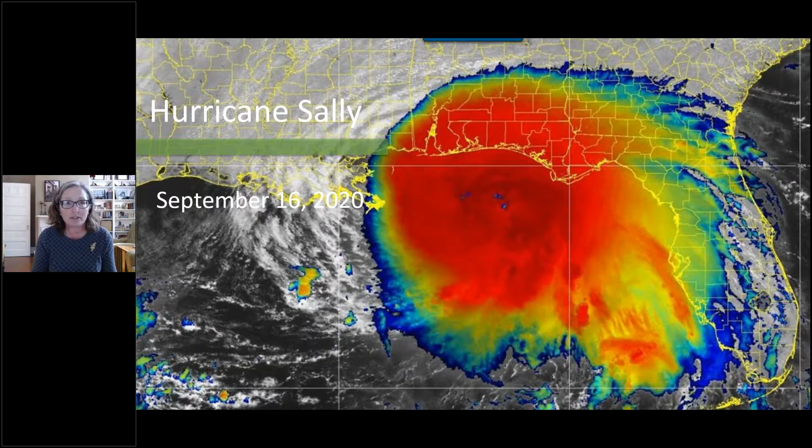Hurricane Sally was the biggest test that we have. The coast of Alabama has, I think, almost 27,000 structures - I can't keep up with how many we have - but we had 17,000 structures that made it through Sally. 95% of them had no to little claim, meaning no damage enough to trigger their insurance to get a claim going, okay? So think about that.

17,000 houses went through a hurricane, and we're going to pause here for a second. It was just a Cat 2, but I'm going to tell you why it was significant. It moved at 4 to 5 miles an hour. Hurricanes don't move that slow. I've been on the coast my entire life, and hurricanes come in, they can be big and bad, but they move quickly through.

We had 17,000 structures that were designated that sat in the eye wall for 7 to 8 hours. That is a beating of up to 110 mile an hour winds with gusts of up to 120. Not a lot of structures can take that unless they're built to take that. 95% of those structures had little to no damage.

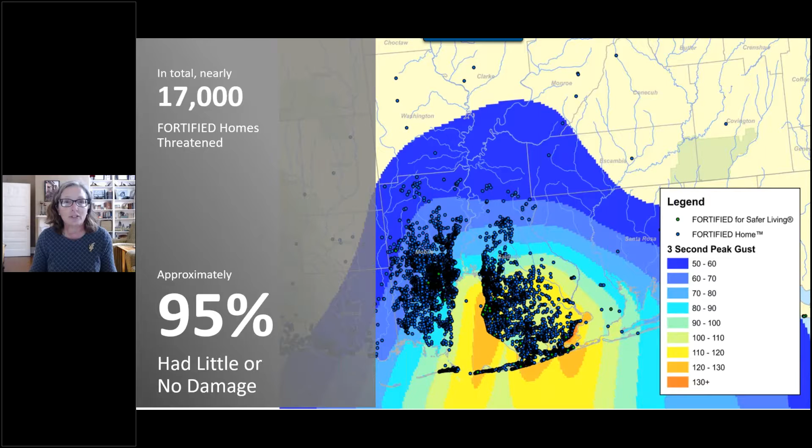That's significant when you're thinking about recovery and what it looks like after each event. Because remember, every time a community goes through a weather event, that structure weathered, so it's taken some damage. Next slide.

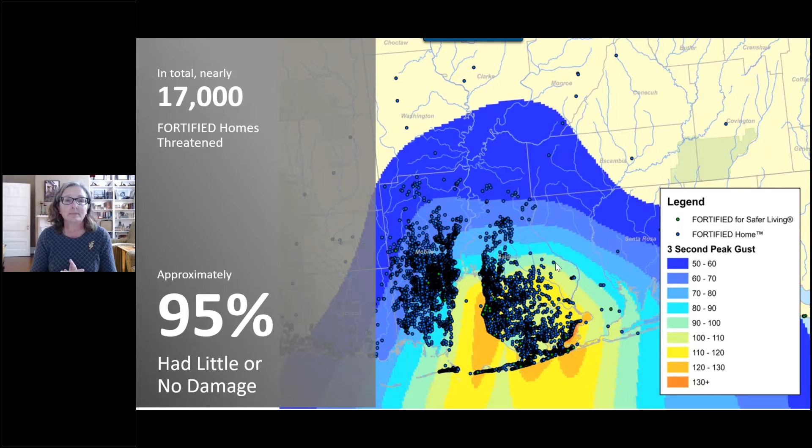So what we saw was that the roof is always the key, and structures that are designated fortified have gotten to at least the minimum, which is a fortified roof. If your roof is lost in a high wind event where rain is involved, rain pours into your structure, saturates everything in the attic, saturates the insulation, collapses the sheetrock, and then everything in your house is wet. That's where you see those visuals after hurricanes where everything's at the curb.